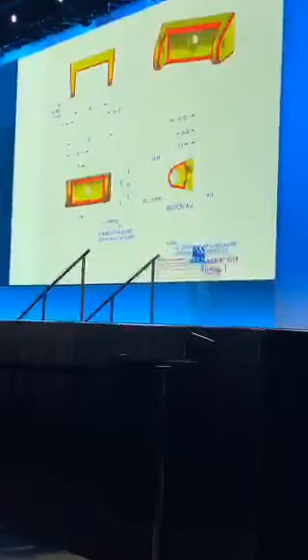Let's go ahead and get started on this. On the right plane, I'll create the sketch. Just going to draw a center line that sets my height of 22 millimeters, and then we're going to draw some circles. There are going to be 3 circles that I'm going to add here because I want to capture all that information in one sketch. You don't need to do this, but it's one of the things I personally like to do.

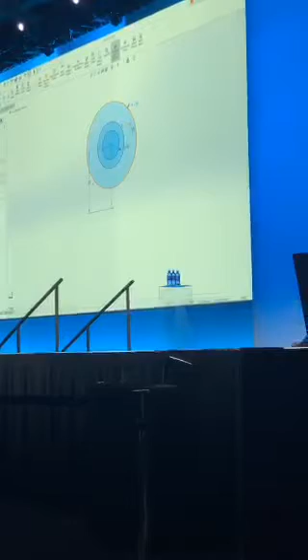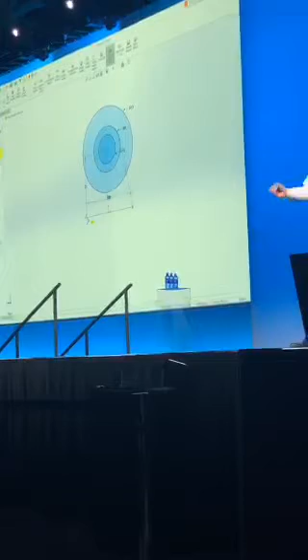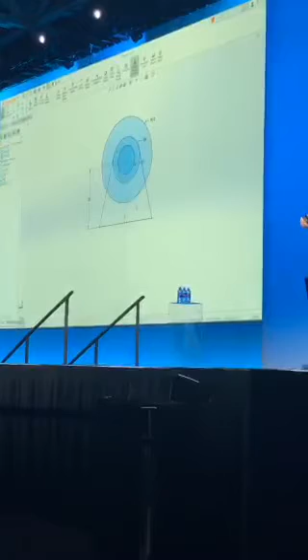3 circles, 10, 16, 30. Actually 16 and 30 are called out on the drawing as radii. We don't need to do this, but if you wanted to help yourself follow along the drawing as you go, you'll know that those are radii. I'm going to pick up tangency on both the beginning and end of that, so that I make sure I capture that tangency, and I want this to be symmetric about my vertical center line. Add a dimension at the bottom, and that sketch is fully defined. For those who took this, there's no need for an angle dimension on that side because everything else fully constrains it.

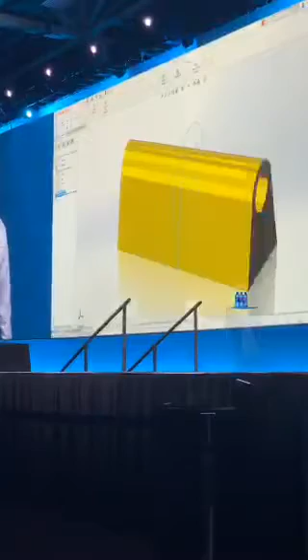I'm going to grab these contours and extrude this about the mid-plane, 70 millimeters. This is going to be 70 millimeters wide - remember that in phase 2, that 70 is important. Next thing we're going to do is take that same sketch, just reuse that information we captured before.

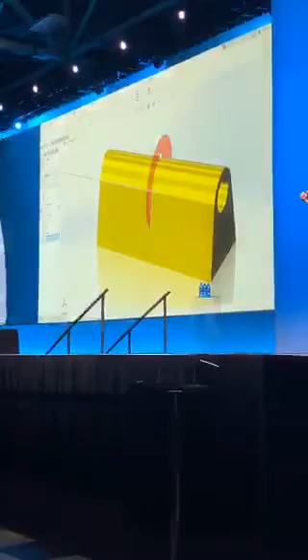And I'm going to make a cut, and I'm going to choose not the region, but the contour to make that cut. We'll extrude that about the mid-plane, 50 millimeters.

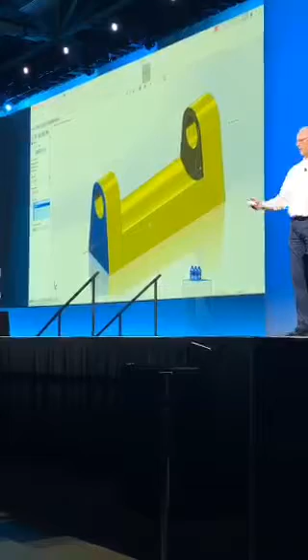So now what we want to do is draft those 2 side faces in. There's a 5-degree draft on each side of those 2 side faces, so I'm just going to choose the top plane as my draft reference. The direction of pull is indicated on the screen. 5 degrees is my draft. Go ahead and lift that up.

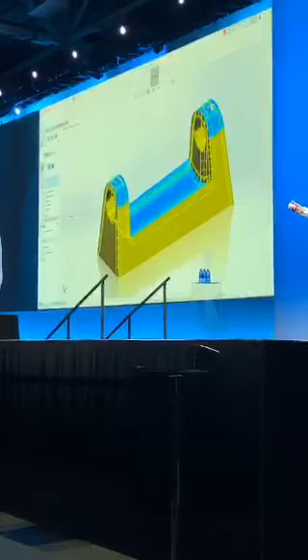Add some fillets. The top, these are going to be 2 millimeters. Just grab 3 faces here - that's all that's needed to capture all those fillets. Now this isn't necessary, but I like to add a color or appearance to those fillets, just gives me a visual reminder of where my fillets are.

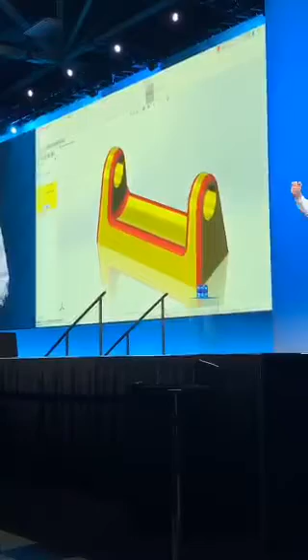Next thing we want to do is add a hole wizard hole. Use the hole wizard, folks - it's really a powerful tool. I don't have to look up all those sizes for those holes, and I don't have to create 2 features in this case. I'm adding an along-Y relationship from the origin there. Once I add that along Y, it locks that sketch down. Because I created it on that surface, it gave an on-surface relationship, and that hole wizard hole is fully locked.

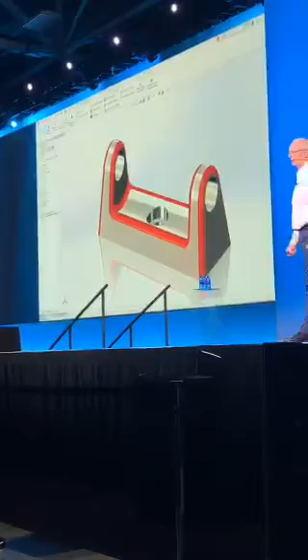We ask you to apply the material and enter the mass into the Model Mania Phase 1 program. So there's phase one, that's what we ask you to do.

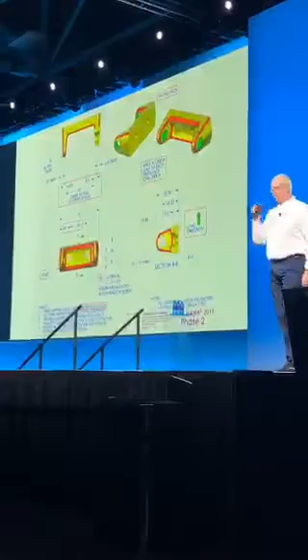What we do then is give you another drawing and ask you to make a change to that same part. So here's the phase two drawing. I'm going to start in the lower left view there - farthest to the left, 2X R30. So that tells me I need 2 radii on the outside of that. Those faces are drafted; if we look up, those are the same faces we had before, but they're also drafted with that 5 degrees.

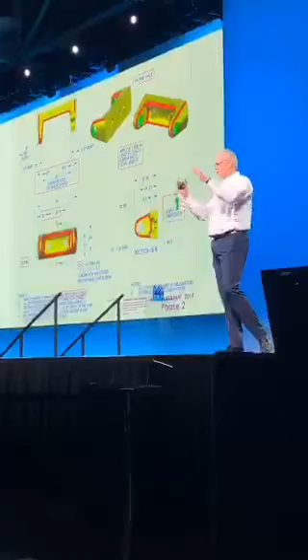Same view, we now have 2 counterbore holes, so we're going to go back into that hole wizard feature and add another hole in there. Then, before I move on, look at the 2R30, those 2 arcs on the end. Notice we still have the 70 millimeter overall dimension, so we don't want to add material, we're just removing a little bit to round those edges off.

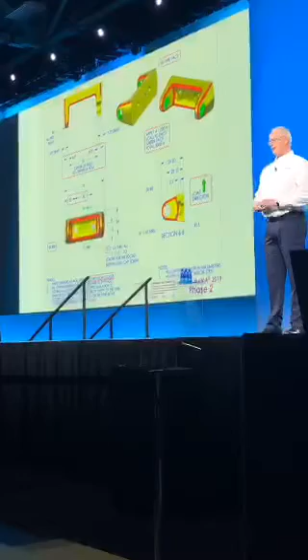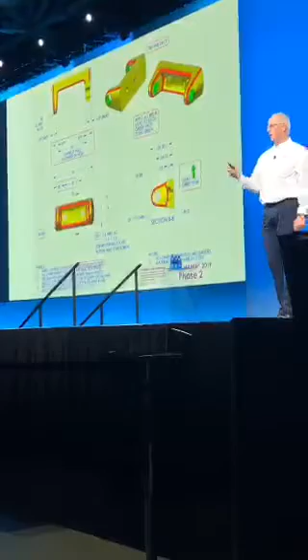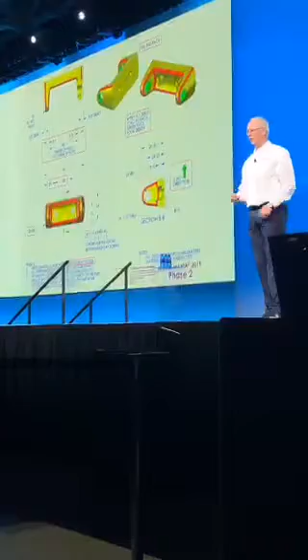So let's see how we did this. First thing I'm going to do is cut that material away and get those sides drafted in. So I'm going to sketch on the bottom face here, and I'm going to use a rectangle, center point rectangle. I'm going to use the from midpoints because that gives me a vertical center line as I sketch, and I'm going to use that for mirroring. Those 2 outer sides, I'm going to make those construction geometry, and then I'll add in a 3-point arc.

Just draw a 3-point arc. We'll make that 3-point arc tangent to the overall width, which is 70. That captures my 70 as I go. We'll put a dimension on that, 30 millimeters, and mirror that to the other side. Once I mirror that, I will have a closed contour, and I can use that to make an extrude cut.

So I'll extrude that through all, but I'm going to choose the flip side to cut, because I want to cut material away on the outside. I don't want to cut the inside away, I'm going to cut material away on the outside. So that takes care of that.

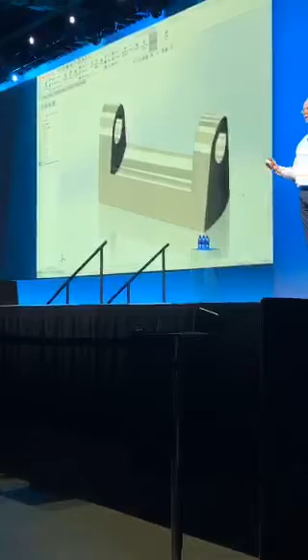My draft fails, okay, I get it. Let's go in and edit that feature. I'm going to have some missing references, no problem. I don't even need to worry about those, because I'm going to reselect 2 new faces. And then when I choose to exit the command, it says, hey, I'll get rid of the missing references for you, so that's great. Easy way to add draft.

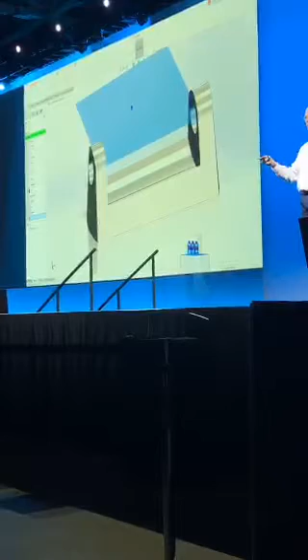Next thing I'm going to do is add another plane. This plane is going to go through the center axis of my model, parallel to the bottom plane. We're going to use that to add draft. Remember, draft can add material or it can remove material. So I'm going to choose that as my draft plane, and the 2 faces to get that 8 degrees of draft. It's going to remove material at the top and add material at the bottom. A lot of people had a lot of painful ways to approach getting that draft done. So you can see that your fillets come through, no problem.

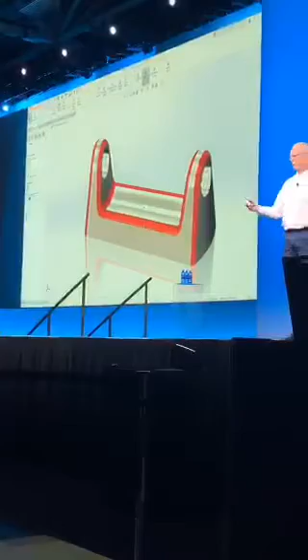Here's a little exercise in editing a 3D sketch. I'm just going to remove that relationship to get rid of the along Y relationship. Drag this one over here. Whenever I place a point in a 3D sketch on a face, it's going to give me the on-surface relationship. I'll put a construction line in here and make that along X. I want that to go along X. And then, from the midpoint, we're going to add an along Y relationship to the origin, add a dimension, and that sketch will be fully locked down.

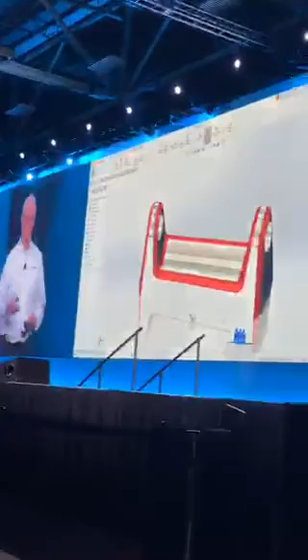So again, I encourage people to use the hole wizard. I saw all kinds of revolves, multiple cuts, applied planes, and you made it a little bit harder than it needed to be. So that's the modeling for phase 2.

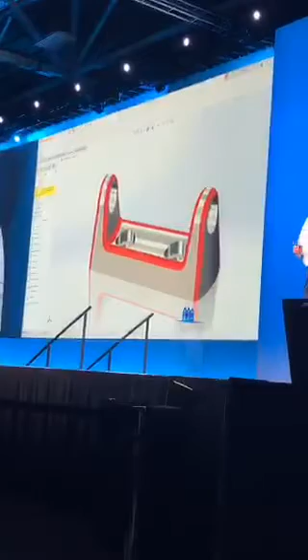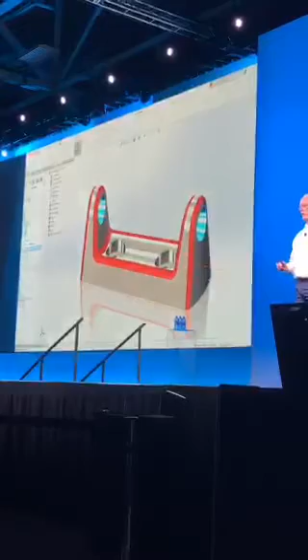Modeling's all done. Next thing we want to do is run simulation. You're allowed to use SOLIDWORKS Simulation or Simulation Express. In this case, I'm using SOLIDWORKS Simulation. We're going to apply a boundary condition of fixity to the bottom, make that bottom face fixed, and then we'll add force to the 2 circular holes there, the 10 millimeter holes, and those are going to go along the front direction, so the normal to the screen, I guess is what you would say. 1,000 newtons per item, so we get 2,000 total.

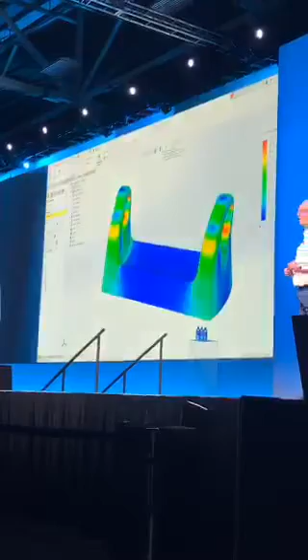We'll hit run. 2 seconds later, we get our results. There's our stress plot. I always like to animate this because it helps me understand, did the model behave as I expected? Yes, sure it did. So next thing we do is ask for the factor of safety. The factor of safety plot's already in there. It's right around 4. So that is Model Mania 2019.